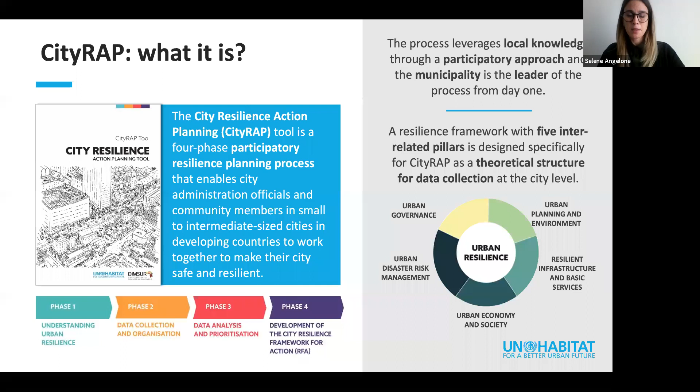So to briefly describe how it works, it's a 4-phase process. We aim at involving 200-300 people each time from different urban stakeholders, as you can see here. And the process is expected to be concluded in 3-4 months.

Before the kickoff of the process, there is a preparatory phase, which consists of the first contact with the municipality, when we get the engagement and commitment from main officials, from the mayor, and when we select municipal officials to be the leaders of the process—what we call municipal focal points.

The first phase of the process is basically a 5-day crash course where we invite all the identified urban stakeholders together, and where we set the basis, a common understanding of the main concepts of urban resilience and disaster risk reduction. From there we have phase 2, which is where we have the bulk of data collection at several levels.

This data is then analyzed, organized, and prioritized in phase 3, and all the results of these 3 phases feed into phase 4 and into the development of what we call the City Resilience Framework for Action, or RFA, which is the final product of the process.

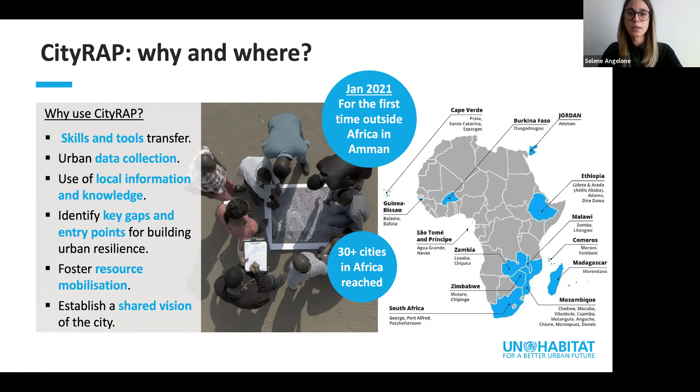So now, instead of going into too much detail about each of the 4 phases, I'd like to bring your attention to some standout features of this process. The first is local data collection. We know that a lack of data is often a problem in an urban context.

With this methodology, data is collected with a unique approach, using exercises developed specifically for this tool. The data collection happens at several levels. We have the municipal level, where, for example, a municipal self-assessment questionnaire of 75 questions is submitted to each municipal department of the city where we are implementing the tool.

Then we have data collection at the community level with participatory planning activities and community consultations. And then we have moments where all stakeholders come together in joint workshops, and through several activities, we continue to gather data and create consensus around what is being decided and the way forward.

Next, please. Another important point is the participatory approach. This tool is built on participatory methods and consensus-building techniques to involve all stakeholders to identify key entry points to start building city resilience in a progressive manner, with the aim of minimal external support. We said at the beginning that the aim is to put the municipality in the driver's seat and to lead the process.

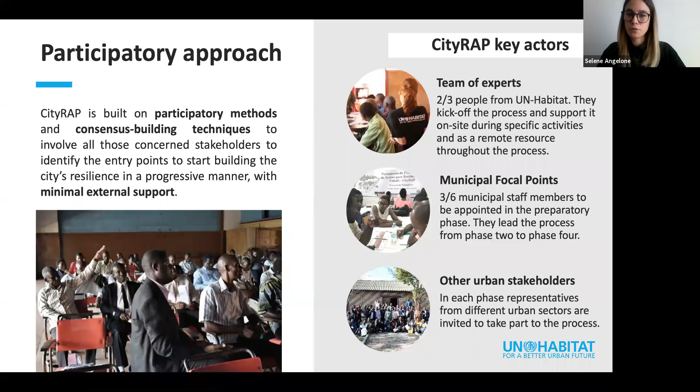Next, please. Another important point is prioritization. We're talking here about building resilience, an all-encompassing concept which looks at reducing environmental and socioeconomic risks, enhancing adaptation, and promoting sustainable development, and it's not realistic to address all these aspects at the same time.

Also, especially at the beginning of the process, a lot of issues regarding the city come up, and it's not realistic to address every one of them at the same time. So there's a need to prioritize and identify key entry points so that the concerned local authorities are fully in control of the process and the process is doable.

To do that, we have a series of activities, one of which is filtering these identified priority issues through 3 prioritization lenses: climate change adaptation and mitigation, sustainable urban growth, and inclusive and safer cities. Next, please.

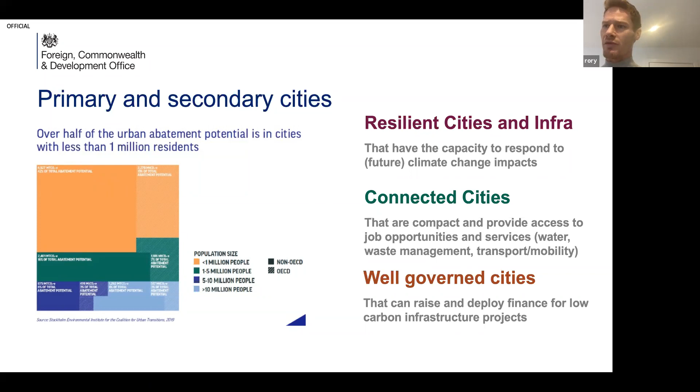And what have we done in response to that at the FCDO? Well, we've supported governments by working with multilateral partners and others to provide technical assistance to respond to those events. For example, in Tanzania, we've worked with the World Bank on urban flooding. The Mbezi River Basin floods frequently most years, and we work with the World Bank to effectively look at the causes and drivers of flooding, and to try and identify the risks, and then to try and generate risk models and engage in participatory planning.

Selene mentioned the importance of bottom-up community engagement, and that was part of the Tanzania Urban Resilience Programme. We've also worked with academic institutions in the UK to generate risk profiles of cities in East and West Africa - that was part of the Urban Africa Risk Knowledge Programme with academics at King's College. So that's about generating a knowledge base that allows donors and others to use that knowledge to deliver interventions that produce a better and more effective response to natural hazards, and again there was a big focus in that programme on urban flooding.

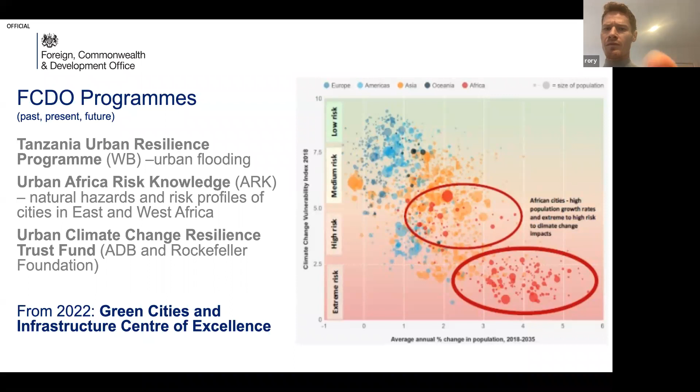That's actually time, so time's up. I'd just like to say I'm happy to share any more details of those programs. This is a very engaging topic, it's great to have you all here. I think the climate change agenda, and the focus on our cities within that agenda, will be at the forefront of FCDO's efforts for the foreseeable future. We've got a role to play in that, and it's great to work with you all and share this knowledge and ideas about these tools.

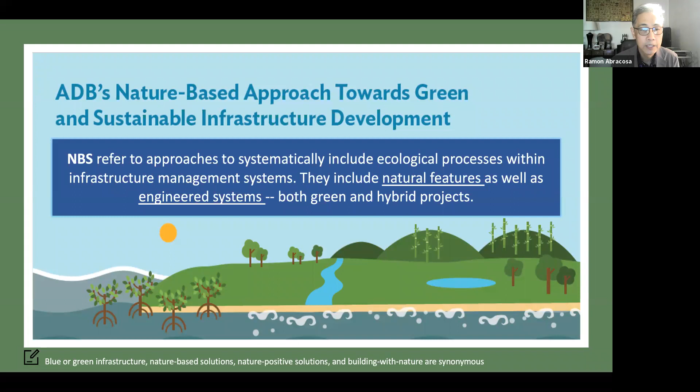Next, please. So nature-based solutions are seen as complementing hard engineering solutions. They're not to be seen as an exclusive alternative, but as a complementary measure for promoting sustainable urbanization and, more importantly, improving risk management in the face of imminent climate change.

Transportation, smart roads with measures to protect the habitat, and this is very strongly seen in protecting coastal roads through restoration and protection of the adjacent mangrove areas. And in agriculture, of course, habitat conservation for protection of the landscape to sustain productivity. Next slide, please.

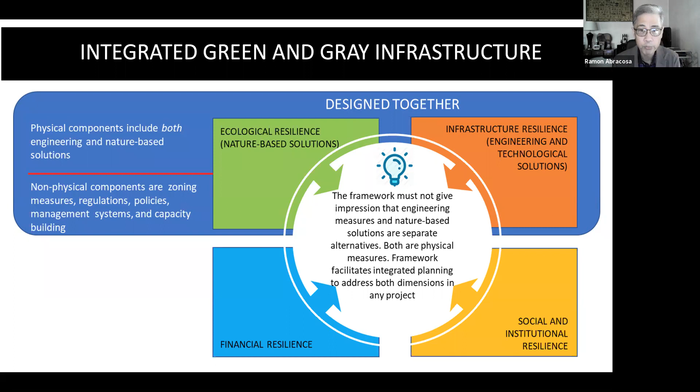Now, the investment case for integrating NBS in infrastructure is quite compelling. Well, some would say, yes, compelling theoretically, and we do need to make the case for that in more concrete ways. But nevertheless, there is a strong case to be made that combining green and gray infrastructure is more cost-effective and enhances economic efficiency than either one of them separately.

As you know, hard infrastructure is expensive to construct and maintain as a standalone solution. If you can combine that with suitable green measures - an example would be instead of building a very large flood control system with huge floodways, canals and pipes, why not combine that with a solution that takes advantage of the floodplain, of the wetlands, so that these natural aspects of the ecosystem are able to detain water. After the peak storm passes, that detained water can be slowly drained into a more modestly sized hard infrastructure flood control system. This is one example of how a combination of green and gray infrastructure can be more efficient, cost-wise as well.

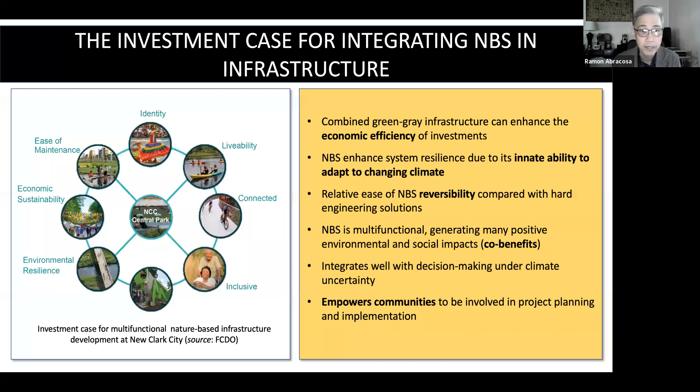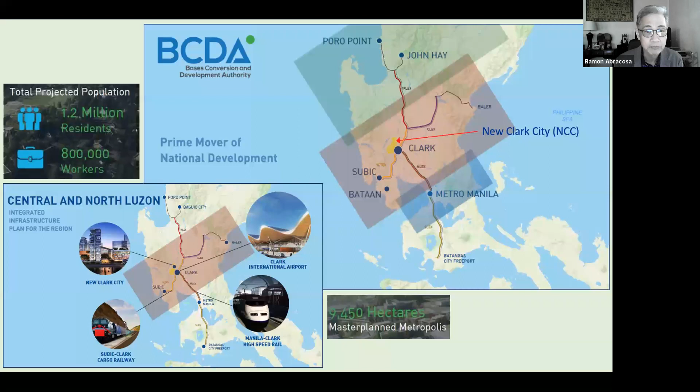So the vision of the city is to be a model for urban adaptation and resilience, using the river system as the centerpiece for its development. Specifically, to provide more open space for the river to carry flood flows instead of confining the river in structural engineering measures like embankments, and use the open space provided by this approach to preserve the area's rich biodiversity, because it's a greenfield area, and thereby create a distinct identity that could be very important for marketing the city to investors and for its sustainability, as well as its resilience to future climate change.

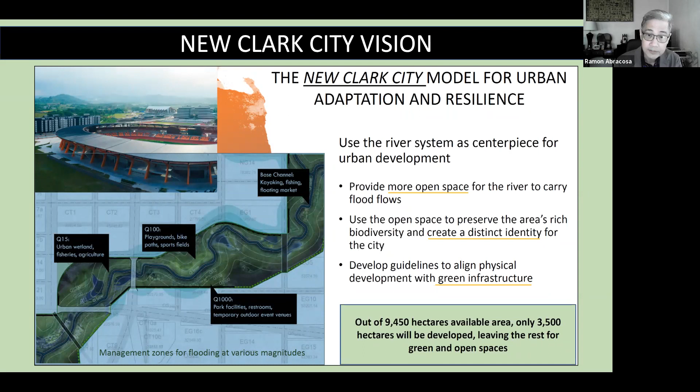Here you see an overview of the site. The part to the northeast is where development has already started. That oval that you see there is actually a sports arena, and the place hosted the last Southeast Asia Games. Beside that is a government center that was developed with support from the Asian Development Bank. It's a public-private partnership, and the bank provided transaction advisory services. But you see the river is meandering across this landscape, and being a relatively flat area it's susceptible to flooding, and more so in the coming years because of imminent climate change.

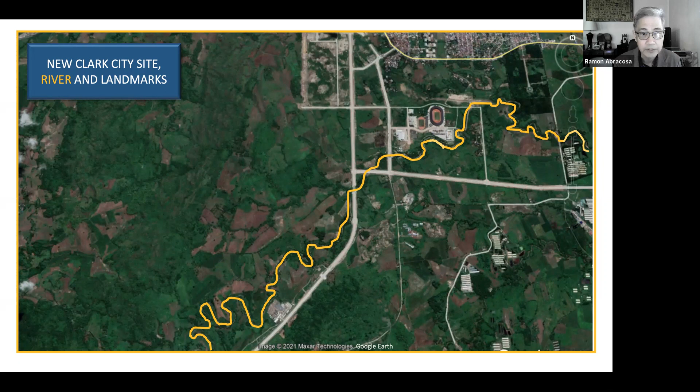So the original master plan for developing the new city adopted a gridded layout, traditional for urban planning, where you want to maximize real estate that you can commercially benefit from. But this traditional gridded layout is associated with the solution of training the river, if you like to use that word, by channelizing it, aligning it more or less to conform with the grid orientation, and within that concept, confining the river within embankments.

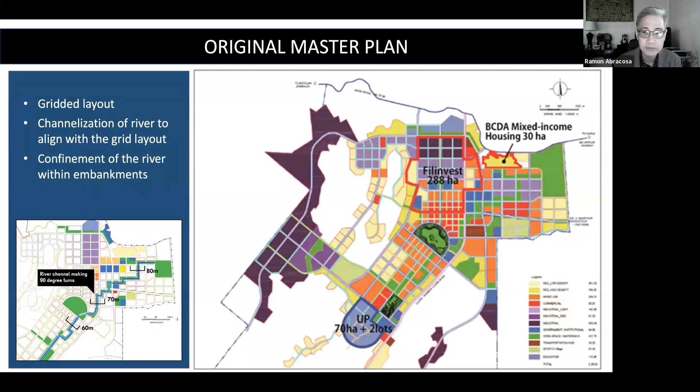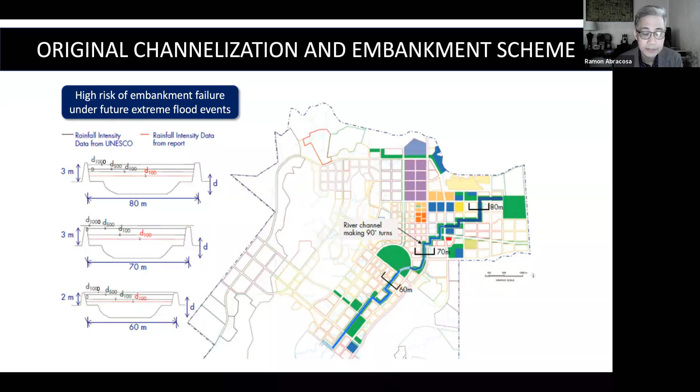This channelization and embankment scheme was found in our review of the master plan as risky, and we said so to the development authority, because it creates really a high risk of embankment failure in the future under extreme flood events already predicted in climate studies. And embankments usually also create a false sense of security that magnifies the potential impact when it actually fails.

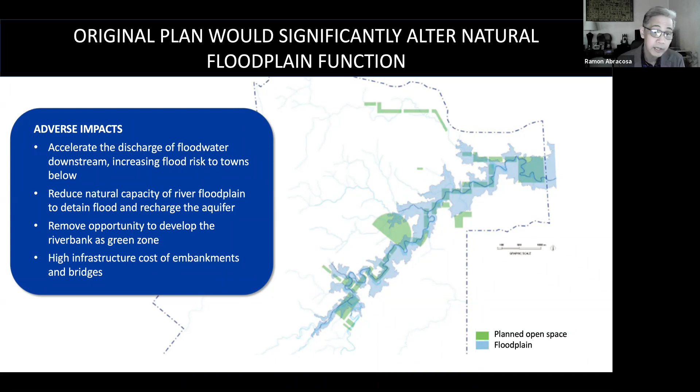The original plan, through that river alignment and confining the river in a pair of walls, would accelerate the discharge of flood water downstream, because it's now better channelized and streamlined. But that would increase flood risks to the towns below. Also, this original master plan solution would reduce the natural capacity of the river, the floodplain, to retain flooding and slowly release it downstream, as well as recharge the aquifer, important for the future water supply of this new city. Third, it would remove the opportunity to develop the riverside or the riverbank as a green zone in line with the city's vision of marketing itself as a green city. And finally, it would entail high infrastructure costs of embankments and bridges. The next slide will show that.

Here the study proposed that the solution would be to preserve the natural river alignment, its meander. It's a nature-based solution to take advantage of the river's natural capacity to detain floods. It would reduce construction cost, create space to develop a green zone, again establishing the city's brand as being green, and sustain future groundwater supply. In the map, you see the extent of the flood zone.

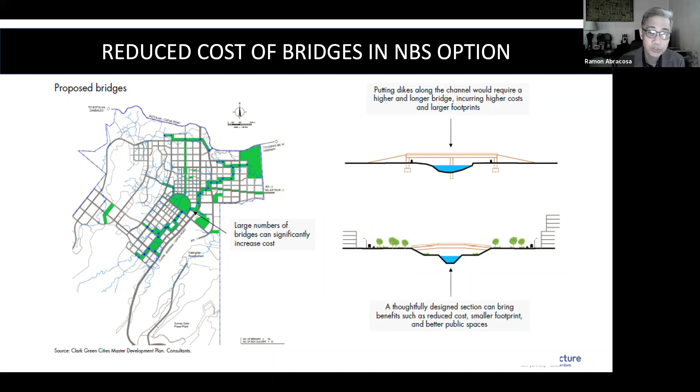So here, if we try to project what the cost of the associated infrastructure would be, for example, the bridges, in an NBS solution it would be less, as shown in the lower right-hand diagram, compared to one where you have embankments surrounding the river, where therefore you need to build higher bridges and longer approach segments to the bridge.

So, good to note that the nature-based solution adopted by the development authority was to keep the natural meander of the river. In this photo, you see the river. On the banks are actually crushed rock that's bound in a metal frame called gabions. So instead of building massive embankments and straightening the river, this solution was adopted. In times of high flows, the river is allowed to overflow in areas designated for that, including, as my colleague Cherrie will describe to you, this park, which is going to be used as a water retention area.

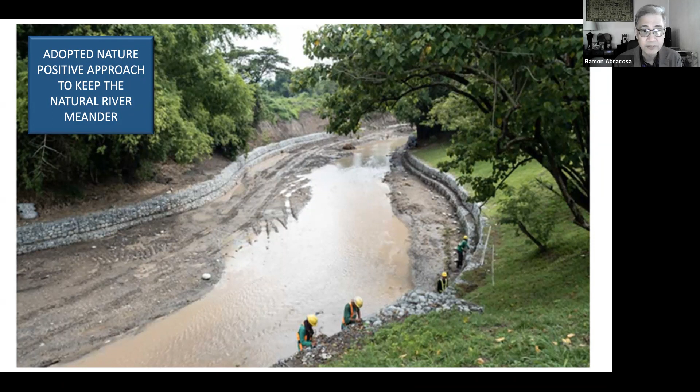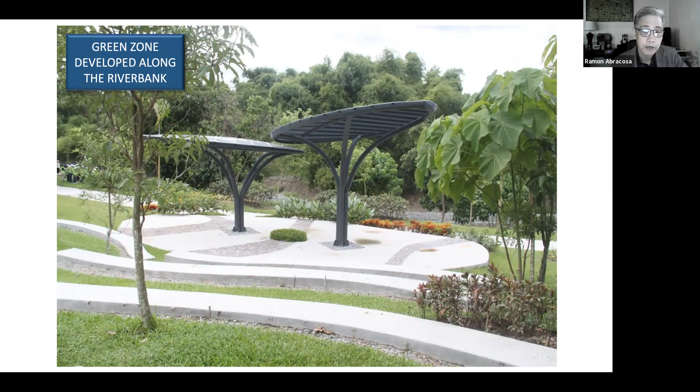And with that solution, it was possible to develop the river bank because it has access to the river, and it's now developed into a very popular riverside park.

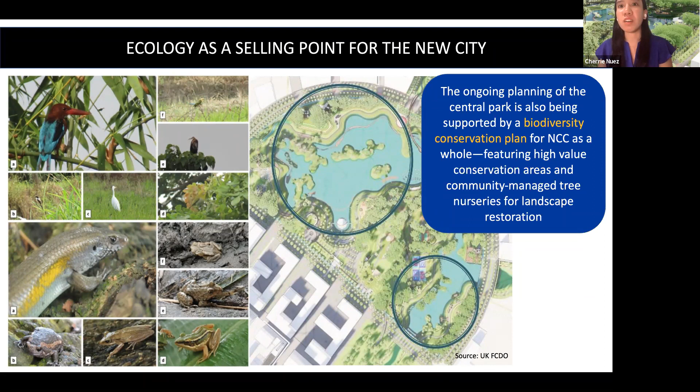To continue the presentation on nature-based solutions in New Clark City, I'll discuss the specific work strands of the GFC program, which is delivering an integrated sustainability plan that covers three specific interventions. First is a participative design of a central park and a citywide open space strategy. Second is a master pilot housing site, and the strategy of a sustainability unit within the city organization.

Now, the first two interventions are site-specific designs and policy recommendations. Meanwhile, the third intervention is institutional capacity building support for the city partner, in this case the BCDA, a national government agency in charge of developing this 9,450 hectares of greenfield land that is envisioned to be the first green and resilient metropolis in the country.

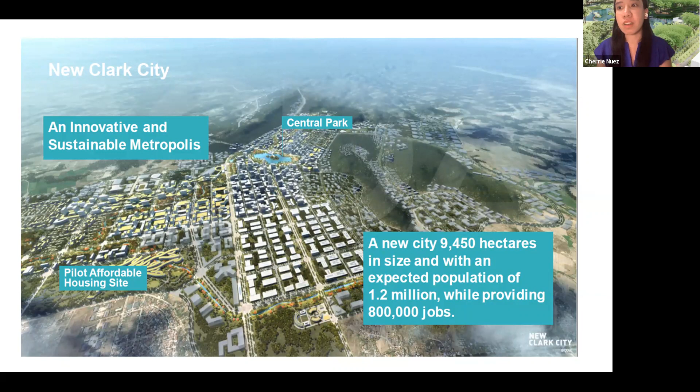So now I'll briefly run through these two project sites that you can see labeled on the map where our interventions in GFC come in. First is the green open space, which we are temporarily calling Central Park, by virtue of it being located at the very heart of NCC and thus becoming its centerpiece development.

What's interesting in NCC is that from the very onset, the Philippine government through BCDA have prioritized environmental sustainability and climate resilience by mandating that two-thirds of the city will be retained or reserved for farmlands, parks, and green open space. As such, FCDO is supporting the design of a central park, which will be the largest green open space to be built in the country for more than 50 years.

So indeed, as a legacy and generational infrastructure project, the park is envisioned to be a benchmark model for how we can use our land and water resources more sustainably to foster biodiversity, how we can allocate green spaces to connect people with the environment and promote greater health and well-being, and most importantly, how we can adopt nature-based solutions to address the threats of climate change.

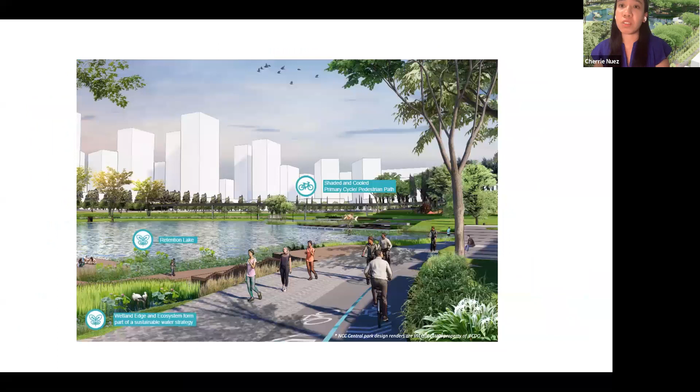Our team from Mott MacDonald has done the design, which heavily features NBS solutions, among which are water sensitive urban design and blue-green engineering solutions for water management in the city. You can see here in the image a man-made lake in the park, which is not merely for aesthetics or recreational function, but is a retention pond, a critical flood mitigation infrastructure in the city, because it will collect rain and stormwater runoff and then release them at a predetermined slower rate via a low flow orifice to prevent flooding and damage to the surrounding environment.

Within the park itself, the stormwater runoff from the various plazas and pavilion structures will run through a sustainable drainage network and will be collected in an underground storage tank. This underground tank will treat harvested water through natural systems to meet potable water quality objectives, and some of the treated water will be used for irrigation, gardening, and other non-potable uses.

The Philippines, being susceptible to extreme heat, we thereby apply the principle of shade over structure in the park, with trees and green natural landscapes to reduce ambient temperature, thus reducing gas emissions and the urban heat island effect in the city. Throughout the park, we also recommend using only indigenous and native plant species to provide natural habitats for wildlife and endemic birds in the area.

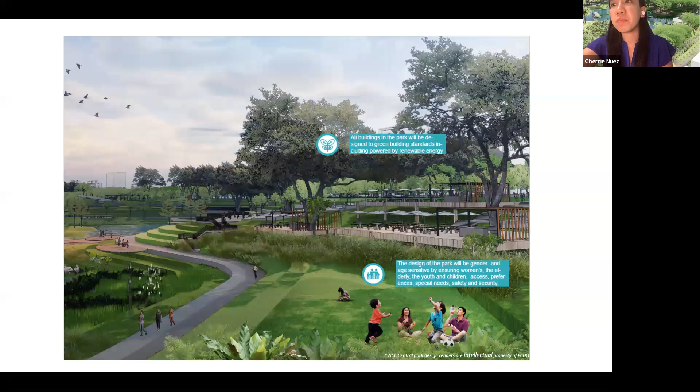This is another example of how we use natural and green landscapes to help minimize the ambient heat temperature in the area.

The trees not only enhance aesthetics, but serve a whole host of ecological benefits such as water quality and soil improvement. Natural vegetation increases the structural integrity of buildings, preventing erosion that could lead to flooding and landslide incidents.

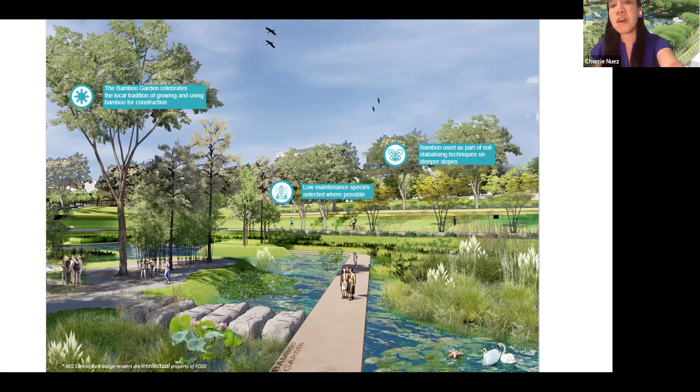The few gray infrastructure and building structures we're recommending for the park, which will house maintenance offices and commercial and retail public facilities, will be designed to green building standards, including use of low maintenance, locally sourced construction materials, as well as renewable energy.

There will be provision for solar powered street lighting, pedestrian walkways, and cycling paths to encourage active physical mobility throughout the park.

Interconnection to public networks is important, so park entrances are directly linked to Clark International Airport and within walking distance to the planned stations of the Bus Rapid Transit system in the city.

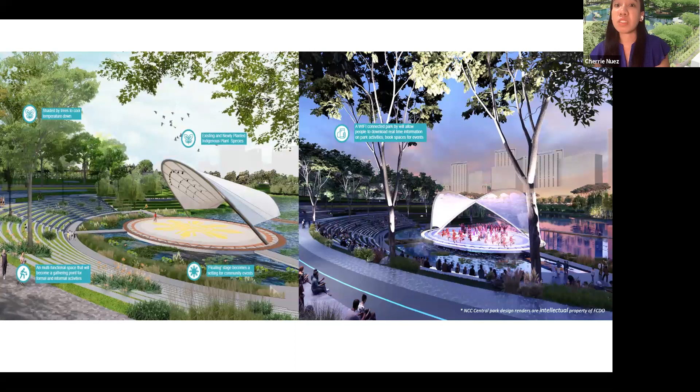Another spatial feature of the park is the allocation of areas for community urban gardens that could produce livelihood opportunities, as well as civic engagement areas such as a multi-use open air amphitheater, which matches the Filipino identity and culture of how open spaces are used mainly for sports, entertainment, and recreational purposes.

I'm conscious of time, so I'll breeze through the other intervention of FCDO and NCC, which is the 34-hectare pilot housing community, envisioned to be the first low-carbon housing village in the country.

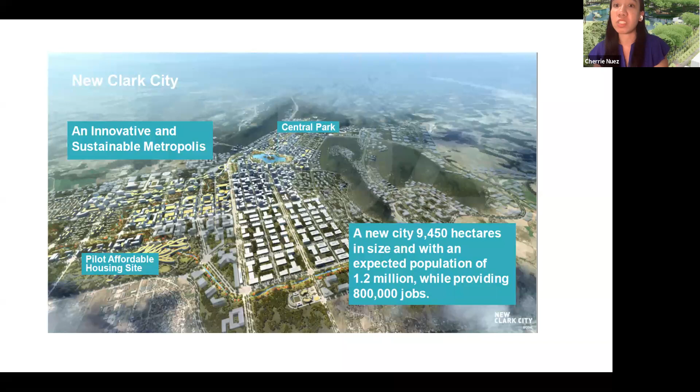Similar to the park, we adopted 8 sustainable design goals to replicate the model of a 20-minute neighborhood, as we often see in European cities.

Those are the 8 design goals that we have similarly used for both the park and the housing.

With the housing community, we wanted this idea of a 20-minute neighborhood, which minimizes the need for extensive fuel car traveling and things like that.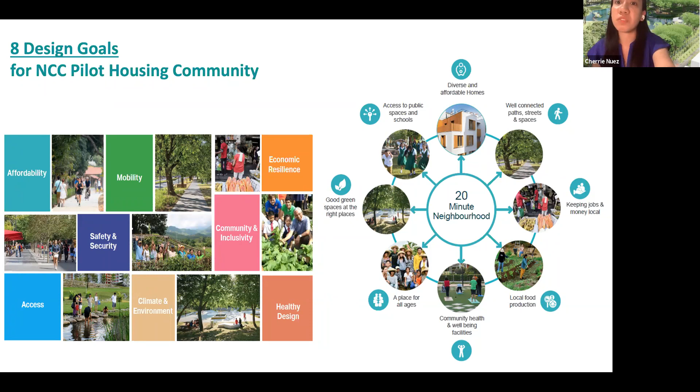Across the different housing typologies in the housing master plan that our team has done, nature-based solutions such as bioswales, rainwater harvesting, natural ventilation and lighting, use of low carbon emitting paints, and locally sourced materials are among the nature-based solutions being integrated in the master plan.

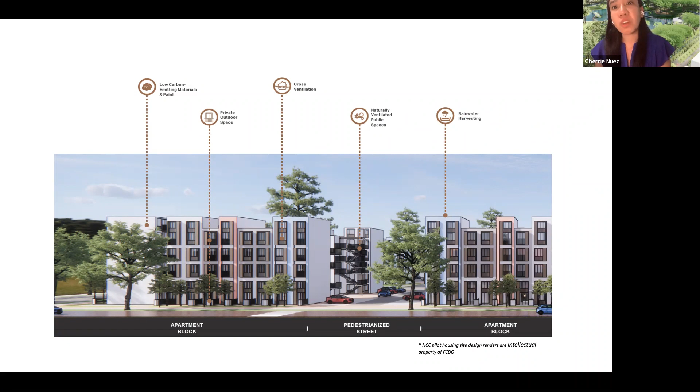These are some of the renders for the pilot housing village, which heavily promotes community urban gardening, pedestrianized streets, and tree-lined shaded outdoor public facilities.

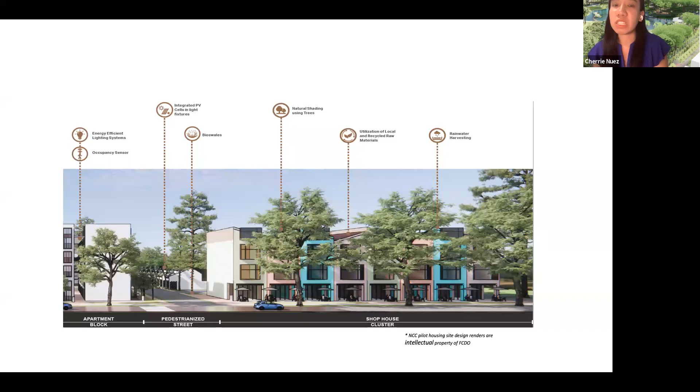Here you can see again we really are advocating for community urban gardening and farm to table markets and the use of public town squares and village parks.

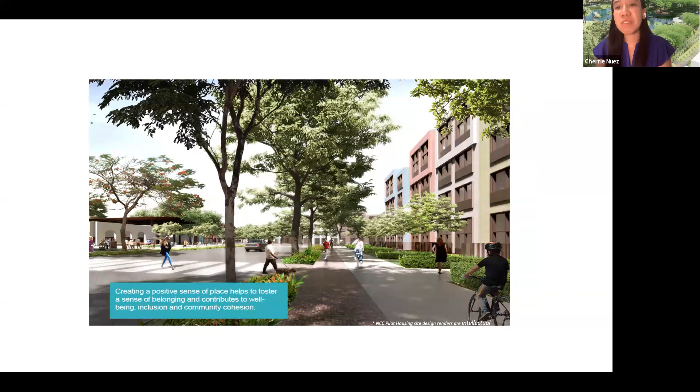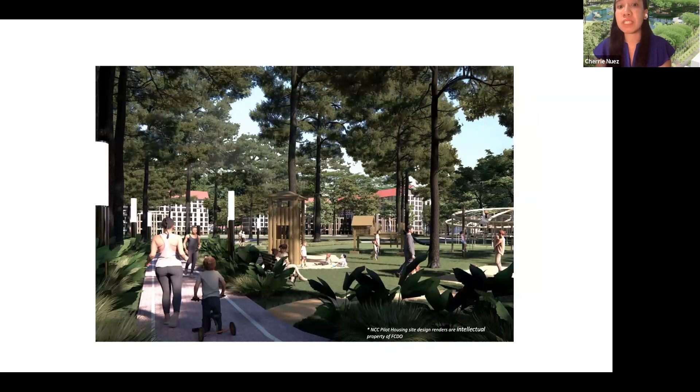That ends the visual tour of New Clark City, which I hope gives a flavor of how we hope to use nature-based solutions in planning our cities, so they are sustainably and inclusively designed to meet the needs of people and planet.

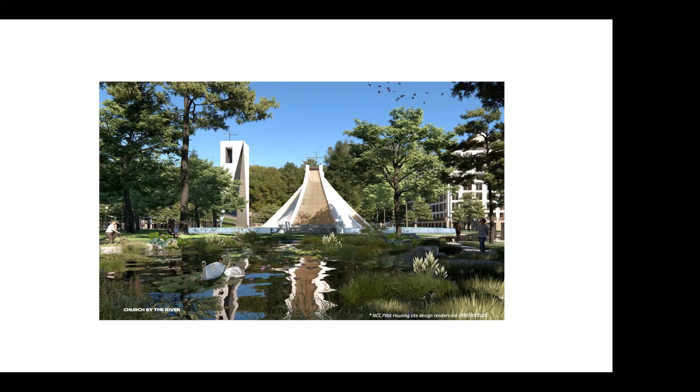Thanks, Cherrie and Ramon. I think you've shown a great example of the collaborative work of the UK financing facilities to deliver resilience on the green city.

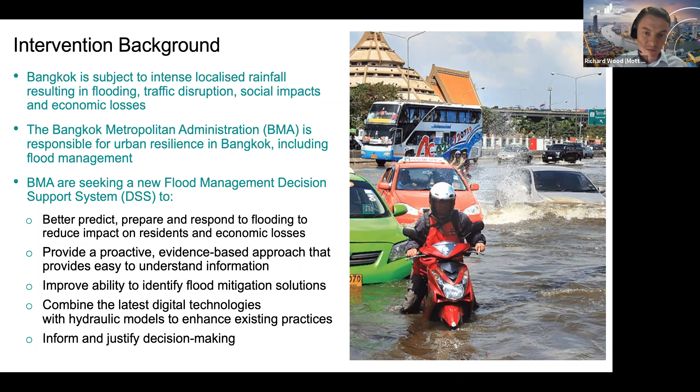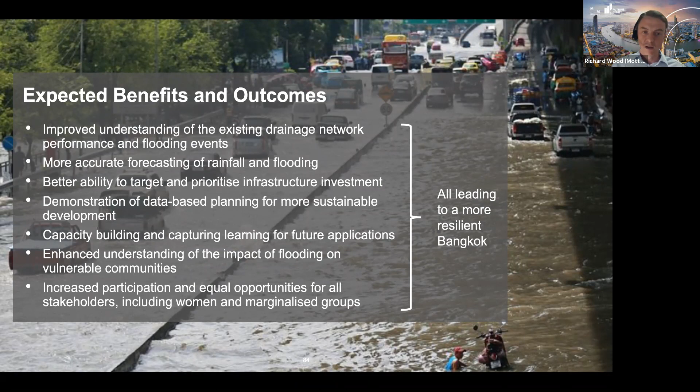A quick overview of the actual scope and our approach. The work we're doing is divided into 4 proofs of concept, or POCs, 4 separate work streams. First is around developing a hydraulic model which can be run in real time to visualize flooding and support decision making. POC 2 is around improved, more accurate rainfall forecasting. POC 3 is around reviewing flood response procedures and trying to enhance them. And POC 4 is really bringing everything together into a digital twin platform, a software we call Moata, and using that to provide rainfall monitoring, forecasting, and real-time flood forecasts, as well as alarms. This is all to help operational response.

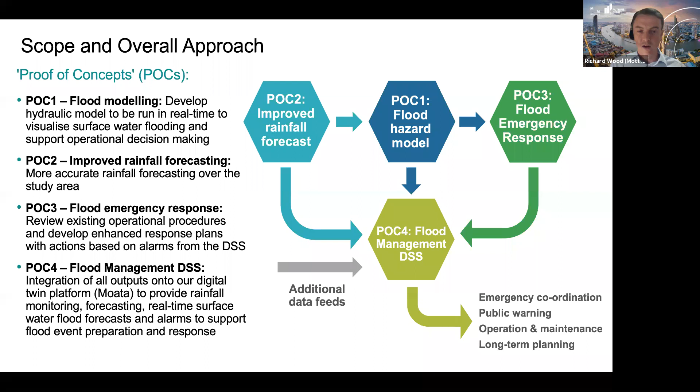A little bit more detail on those work streams. POC 1 is around flood modelling. We have a pilot area in an area called Lat Phrao, just northeast of the city, and it's predominantly flat, residential, and bounded by canals, with several internal canals, and the floods are managed by pumping out into adjacent areas in the event of floods. It also contains several BMA flood watch areas, which is part of the reason it was selected.

The modelling approach was primarily 2D. However, some elements of the drainage and canals are in 1D due to a lack of data. The model was extensively calibrated and validated using existing data, and also comparison with anecdotal information, social media posts, and newspaper articles regarding major events in the past.

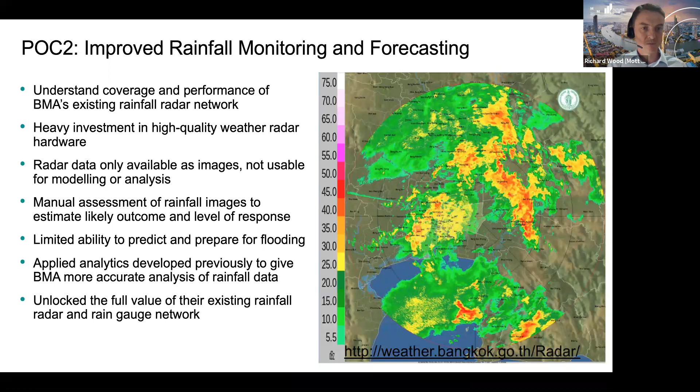So what we did, we installed a temporary vertical profiling radar, which is located on the roof of the BMA office inside the pilot area, for good position, good coverage, and a secure location. The purpose of that VPR was to calibrate the existing radars, basically to compare the data against our well-calibrated VPR, which was calibrated in the office in the factory before it was installed against the existing radars.

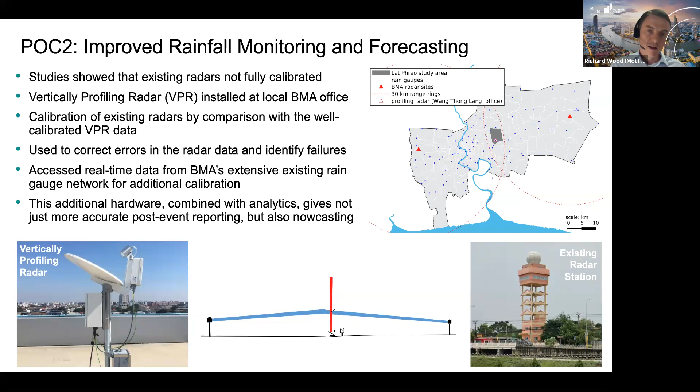So this additional hardware, along with the analytics discussed in the previous slide, allowed us to do not only more accurate post-event reporting, but also nowcasting—a short-term, one to two hour accurate forecast of how a storm is going to develop and where rainfall is going to fall. This is useful for BMA to better prepare and react to flooding events.

POC3 is around flood emergency response, as I said earlier. The scope of this evolved as we progressed, looking at how to respond to flooding, not just predicting it, and how that data can be used operationally in the field, and how those warnings can be used. So we started with a review of existing response procedures, and then brainstormed all emergency responses that could be applied.

We've also built in some alarms within the DSS which can trigger these flood emergency responses, and obviously different flood magnitudes and rainfall events trigger different responses, so different trigger levels.

We're also looking to do a post-event review of a major flood event, looking at what went well and what could be done better from actual events. This piece of work will focus on the pilot area, but it's designed to be scalable across the whole city if required.

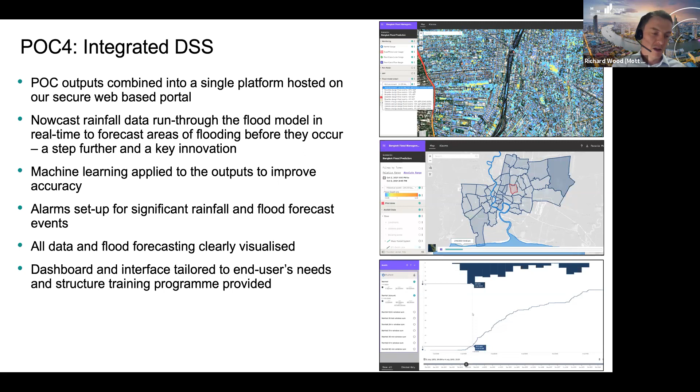I just wanted to quickly touch on some of the other issues that cut across all the work we're doing. Gender equality and social inclusion, or GESI—we've tried to promote the involvement of women and marginalized groups in all the project activities.

Beyond that, we're looking at the actual impacts of flooding. Traditionally, flood studies look at impacts on land and infrastructure, but we're looking at how it impacts on the community and who those people are. Disadvantaged groups are greatly affected by flooding—for example, low-value land and informal housing is traditionally built on flood-prone areas. People there are at greater risk, as are disabled and old people who are less able to evacuate. So we're doing analysis looking at vulnerable communities inside our pilot area, using the model to see how they're impacted.

We're also engaging with the community, and this is just commencing—having roundtable discussions with community groups to really understand their situation and how flooding impacts on them, and how that can be improved.

Another thing we've been doing is capacity building. I've talked about the training on the platform, that's a separate piece of work. We set up a series of webinars. We just had one yesterday around other topics, generally related to flood resilience.

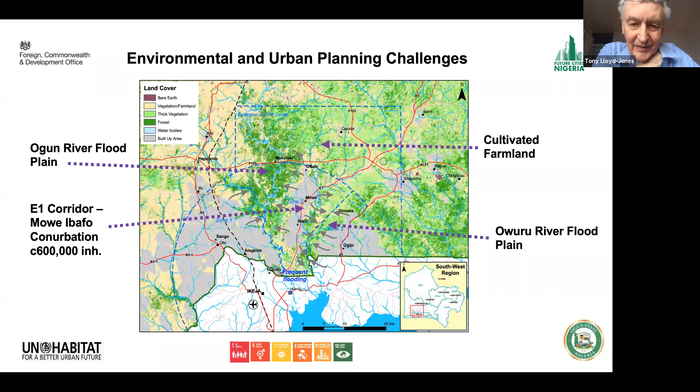I think I'm going to have to rush through the rest of the slides. Can we just go through them quickly, and I'll see if I can comment. Let's go.

Just the same, the map in the middle - we rely a lot on GIS and mapping, and very elegant mapping by our cartographer that shows the urban development, the industrial development that's happening along the road. Institutional development, a lot of religious institutions, very low density sprawl, and the agricultural land, which is being pressurized from urban development.

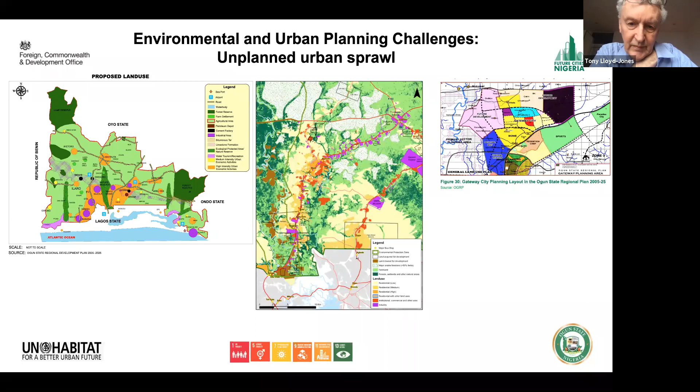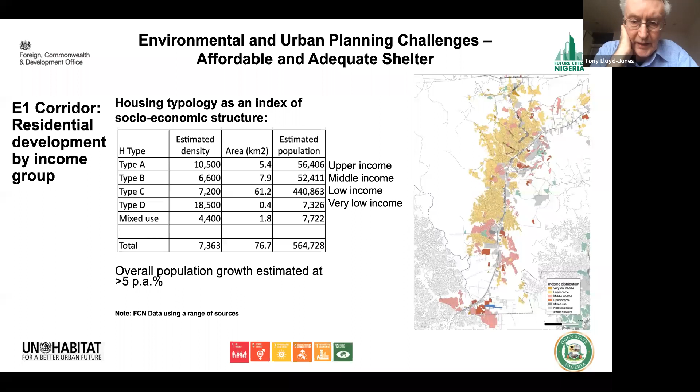What's our response? The main thrust is the bus mass transit network that we're trying to develop along this route. We're developing an outline business case for it. It's an obvious place to have a fast bus service, possibly segregated, very likely to begin with sharing the lane with other traffic, but will displace the informal bus traffic going along there at the moment, or supplement it.

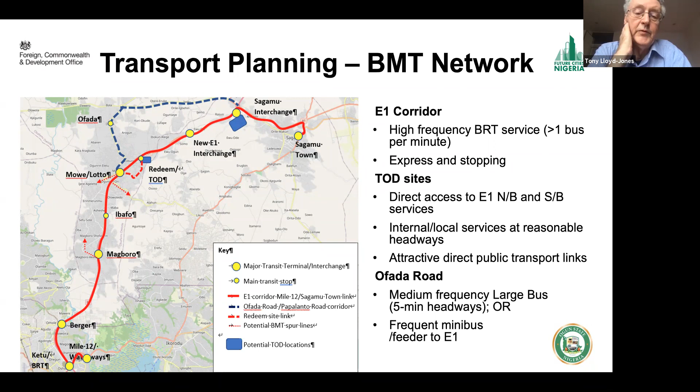We want to work with the informal sector to see how they can be integrated into this network. So it runs from Lagos and from Mile 12 - those that attended previously will know that's a separate water transport project we're developing in Lagos - up through the conurbation to the industrial corridor that's happening beyond, and on to another city called Sagamu, a little further to the north and east.

From the urban planner's perspective, which is where I'm coming from, this is an opportunity for transit-oriented development for a compact city. Where can we look for opportunities for transit-oriented development? I hope the planners among you will be familiar with this - it's not really a new concept. People have been developing settlements around train systems for more than 100 years, but it's become increasingly popular. What are the opportunities for walkable, compact, mixed-use, higher density development within walking distance of a transit facility?

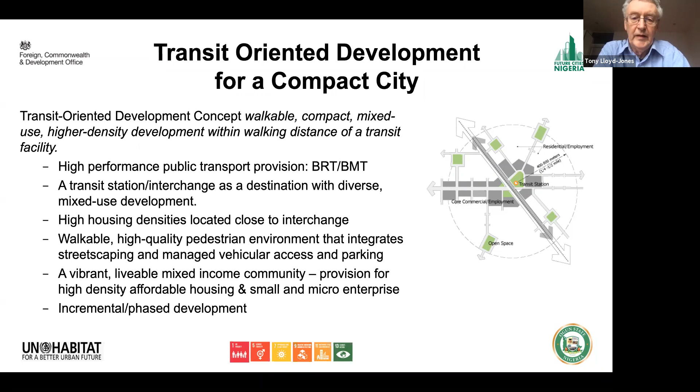That's where our prime focus in terms of urban design has been on this project, which has been going on for a bit more than a year now. These are two sites that we originally identified because of their size and strategic location, as potential TOD sites.

Obviously, we're trying to encourage compact city development along the transit route in order to counter the sprawl that is the predominant mode of urban development. The one on the left is within the existing conurbation - it's a site that belongs to a major religious institution, and we've begun preliminary discussions with them, but these were really capacity studies to see what kind of development could be created on the sites.

The one on the right is up near the big motorway interchange near Sagamu - this is a bigger site. The one on the left, in the existing conurbation, we see as a new town center for Mowe. The one on the right as a more regional mixed-use service center and development.

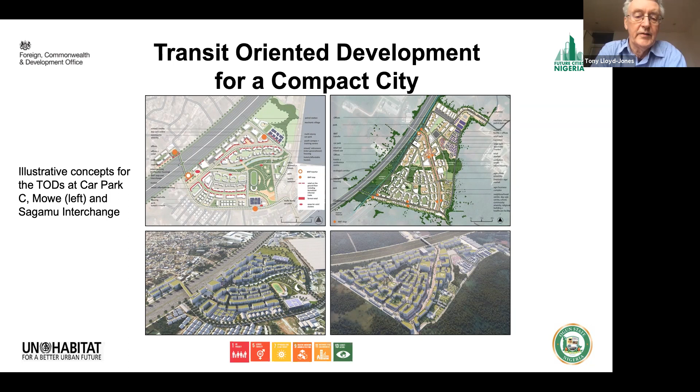So we're looking at sites for industrial development. They're obviously developing along there, but there's lots of gaps, lots of spaces - advising the government on where best to focus their attention with development briefs for industrial sites.

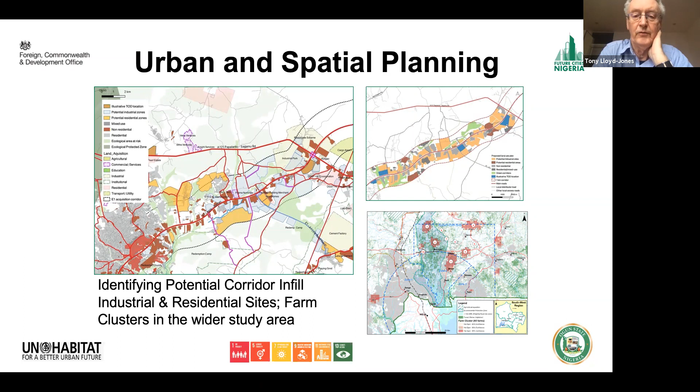The other thing we were asked to look at is farm clusters, and we did an analysis of the data we fortunately had on farms and identified the clustering of lots of farms as well as concentration of cultivated land to the north of our study area, which is why we extended it to the north beyond the original DPA.

So TOD sites potential on the left. We don't have time to do a new regional plan for this area, but we have mapped out some zoning potential for the area, including this agricultural, strategic agricultural zone to the north, the industrial corridors already developing, and something suggested to us recently, which is a major planned extension of the conurbation towards the Sagamu interchange, which we've named the Isoku Triangle New Town.

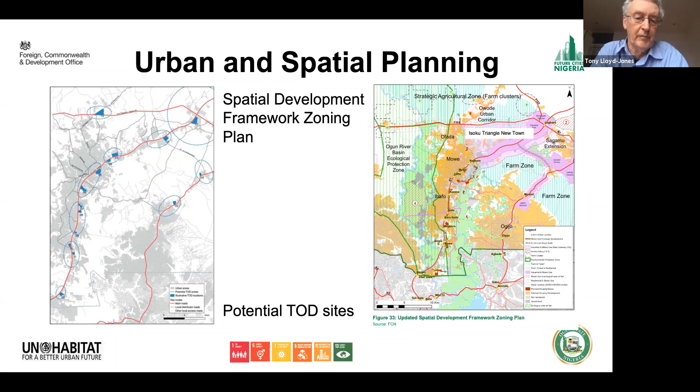I'll explain briefly that this is a counter really to other plans the government has put forward, different arms of the government, we think in more environmentally sensitive areas. This is a higher ground area and an obvious area for planned intervention. The Isoku Triangle is a higher ground above the big river valley, the two river valleys, next to the interchange there, and is already being developed informally.

There is a model for this in Lagos itself, called Alaro City. International investors have got involved, carrying out similar scale developments across African cities. We were advised by a local expert that this would be a good opportunity, but we haven't explored this yet - it's very much an outline idea.

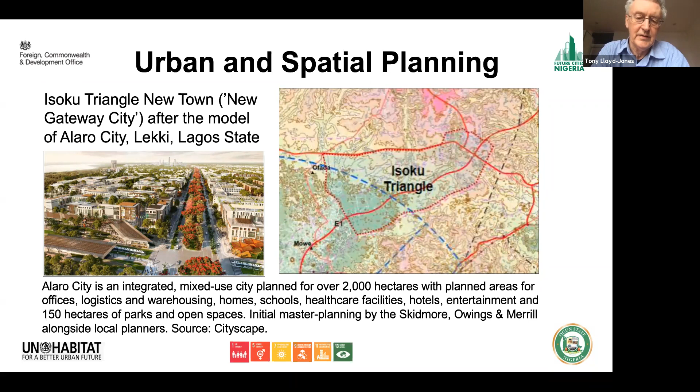We're also looking at energy planning. If you recall, I listed all the stresses - these are things that will have an impact on mitigation but also relieve stresses related to adaptation. Nigeria is totally dependent on fossil fuels, particularly diesel. It exports its crude oil, imports the refined product, and the grid power supply is inadequate. So we were asked to look at off-grid solutions. We've looked at solar, but the biggest opportunity is probably a blended energy integration model, including biogas, relating to what's a very big agricultural state. Ogun State is primarily agricultural as well as industrial. These would be integrated with the new farm and industrial developments we're proposing.

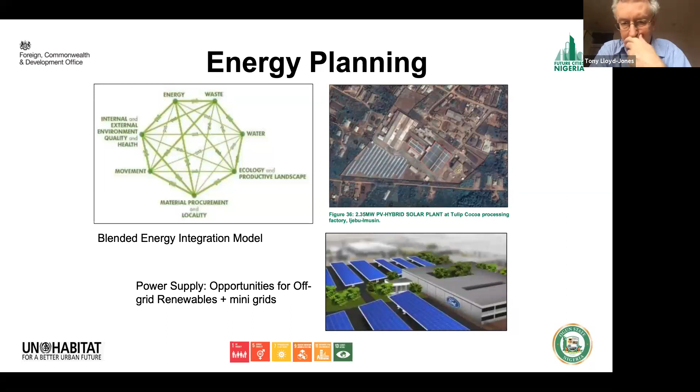This is of particular interest. Sorry, I'm already 10 minutes over.

Building on the adaptive capacity of urban poor households.

So we've done an analysis of industrial development in the area. The expected industrial growth in Ogun State, much will be in our area, with a multiplier effect of possibly 4.5, which will add to the local population and create a much expanded informal economy.

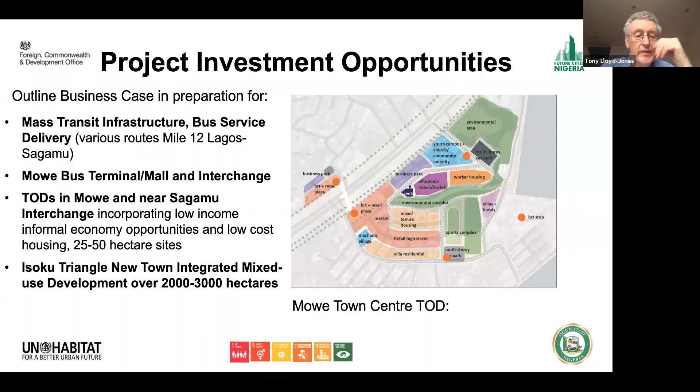Industrial corridor development, mixed-use corridor, street regeneration along the corridor related to the BRT, strategic integrated rural development programs, off-grid and mini-grid renewable energy opportunities using the blended energy integration model.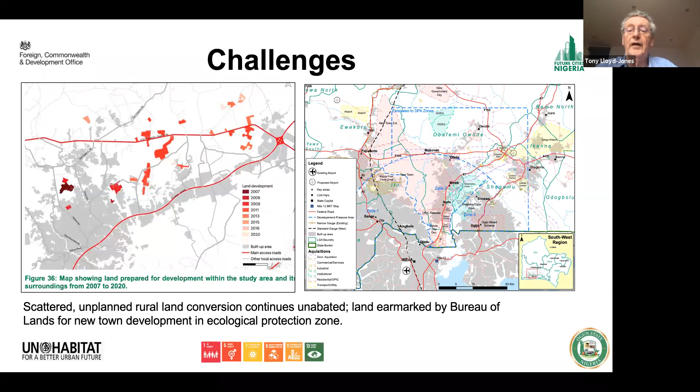So the lessons are pretty much the same wherever we are. We need to work closely with city officials, but also with the wider stakeholders and communities - their involvement is essential. There is a regional plan; it needs updating, and it needs to be in line with compact city concepts, which will relieve stresses, help in adaptation, as well as helping with mitigation. We need a clear framework for implementing that. The project vision needs to be closely aligned with climate change mitigation, clearly. Ours is not a resilience project, but nevertheless, that's what we are looking at.

Adaptation, appropriate SDGs, and making it easy to implement. We've come across this issue of data. There is poor data. We actually have got quite reasonably good data in the case of this part of Nigeria, but still we have to do a lot of work with GIS to gather more.

Partnership with private capital is critical in enabling governance, as we've heard. More urban planners, please. This is what I've come across everywhere, cities with one urban planner for a city of 1 million. This is not going to work. Unless we get control of the development process, we're never going to get anywhere. We'll get somewhere, but not fast enough. We have to move fast. Thank you very much.